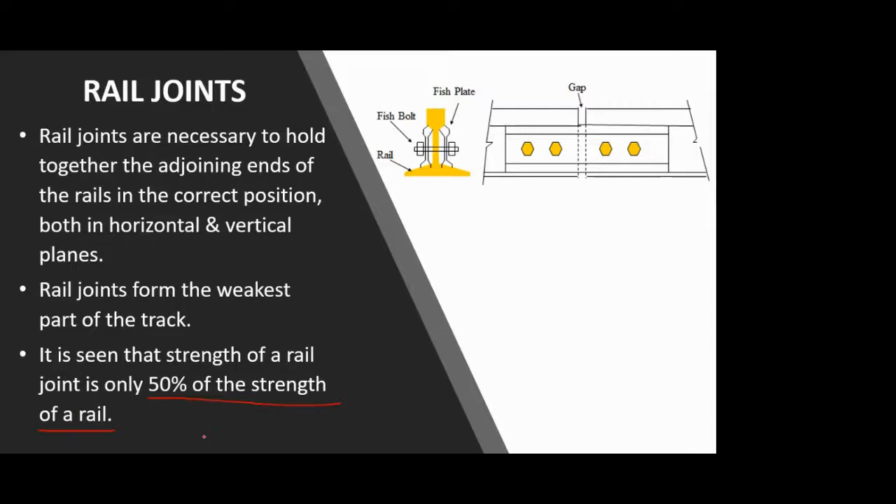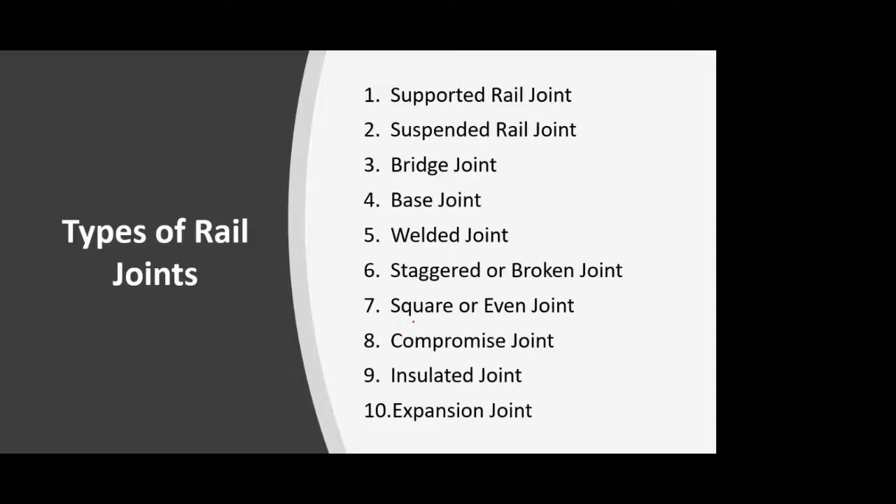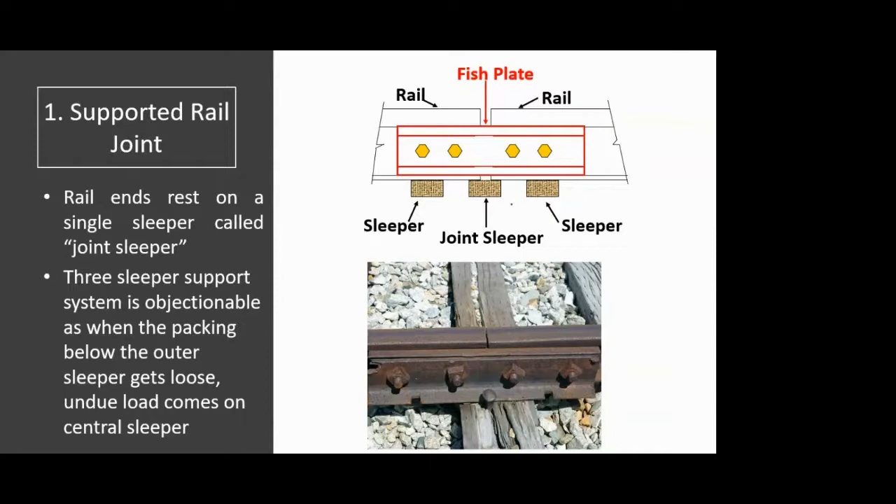Then we saw the ideal requirements of a joint, and looked into the details of each type of joint. First, the supported rail joint, in which a joint sleeper supports the gap between two rails. Then the suspended type, where the joint sleeper is absent and the gap is kept suspended between two shoulder sleepers.

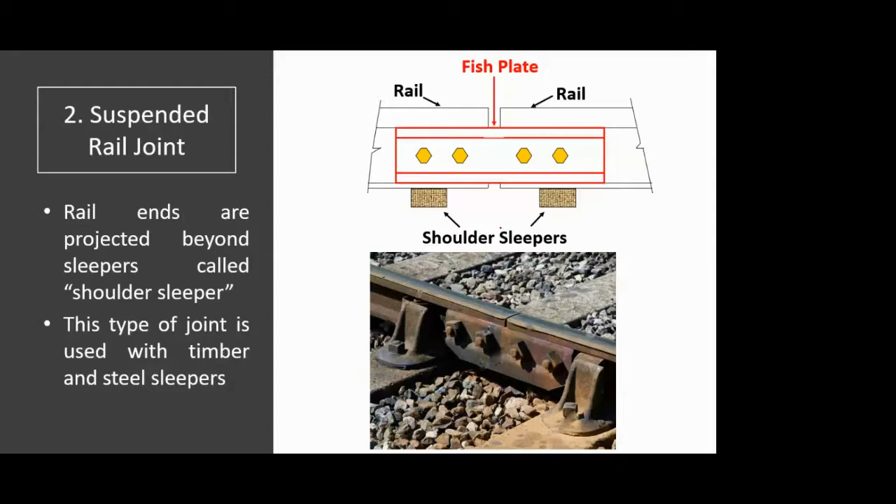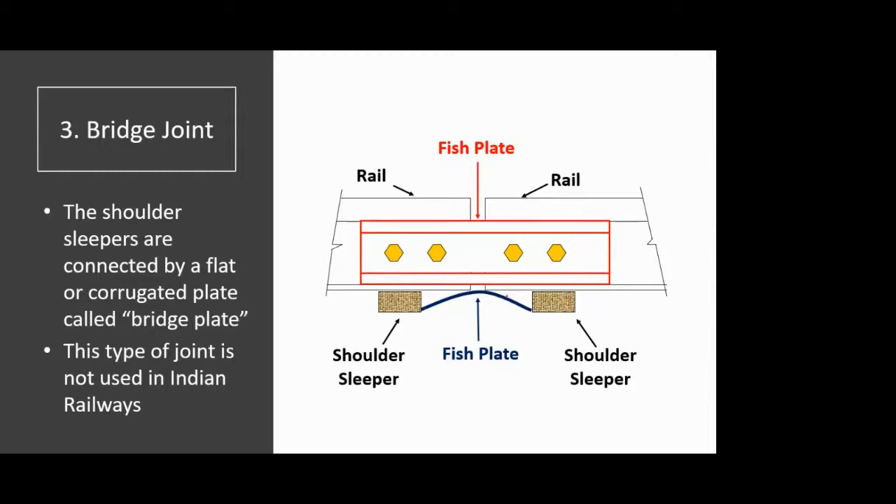In the bridge joint, the gap is supported by a fish plate, which is a metal plate in a curved shape. Generally, we don't use this type of joint in Indian Railways.

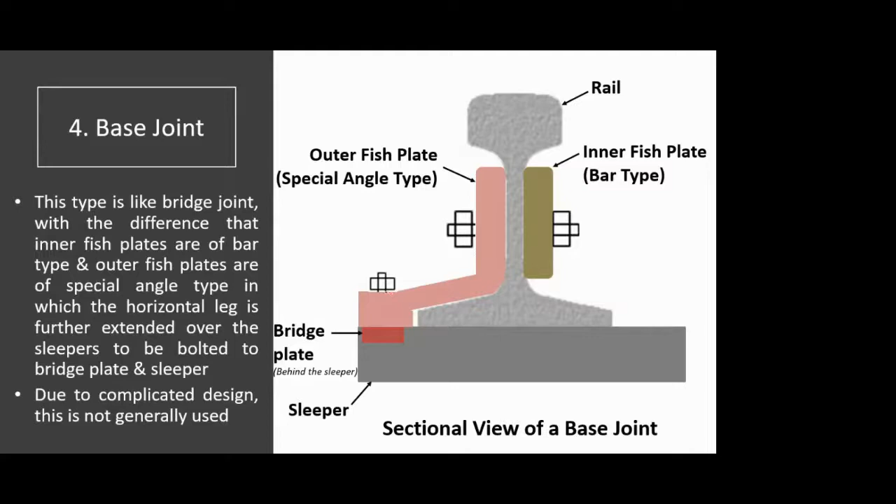Then you have a base joint, which is a bit complicated in design, as you have two different types of fish plates. The inner one is a simple bar type, but the outer one is a special angle type, so that its shape matches the foot of the flat-footed rail, as well as the bridge plate and the sleeper. Its leg is connected to the sleeper and the bridge plate at different locations.

Then we saw the welded joint, which is almost an ideal type of joint. In this, the gap between the two rails is simply filled by a weld material.

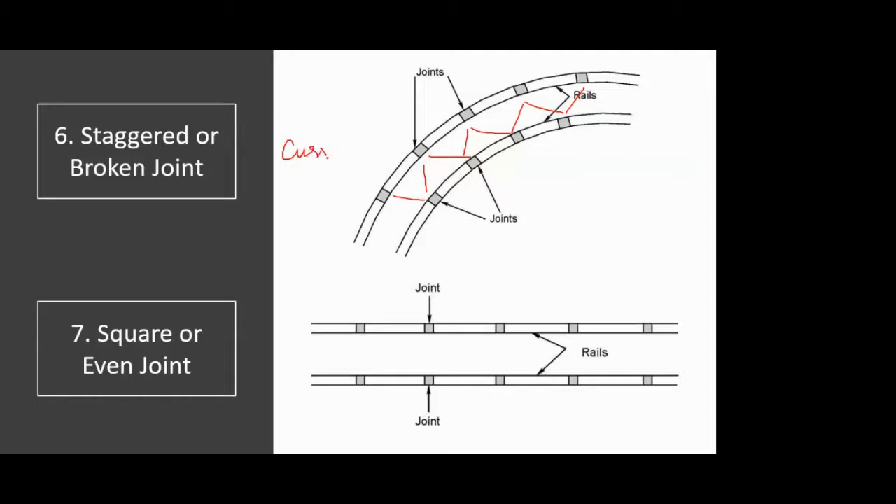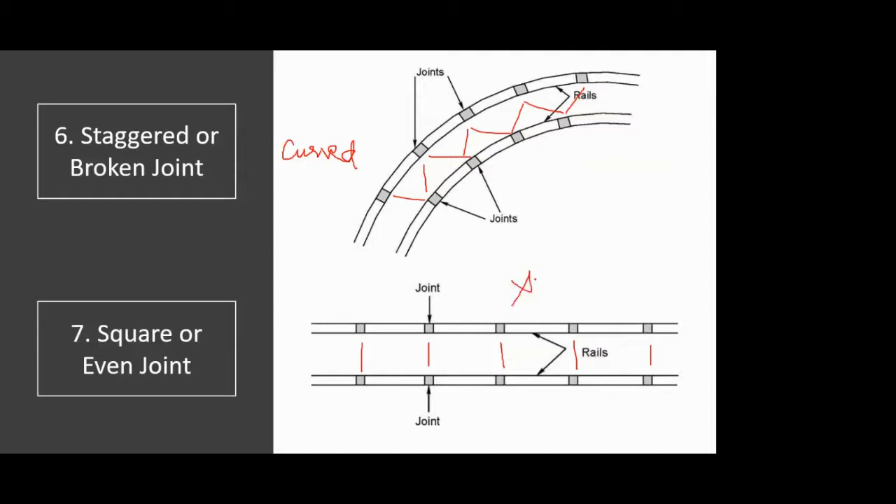Then we saw staggered and square types of joints. Staggered joints have the joints on opposite rails in a zigzag manner, found on curved sections. Square joints are parallel to each other and are found in straight sections.

Then you have a compromise joint, used when you have two different types of rails to join, where you only have a small indentation or change in shape of the connecting fish plate. The insulated joint is used to cut off the track circuiting.

If anyone is interested in track circuiting, you can search it on the web. The last one was the expansion joint, in which gaps are maintained at particular distances, allowing free expansion of the rails so that thermal stresses are not induced beyond a certain limit. So these are the types of joints.

Then we covered the evil effects of joints, and the remedies to overcome these effects, such as using shims or repressed fish plates, along with other remedies that are more a part of regular maintenance work that goes on in the railways.

So today we'll cover a short topic on welding of rails. We all know, or must have seen at some point, what welding is. Many of you might have also done hands-on welding during your first year workshop, where you were given basic knowledge of it.

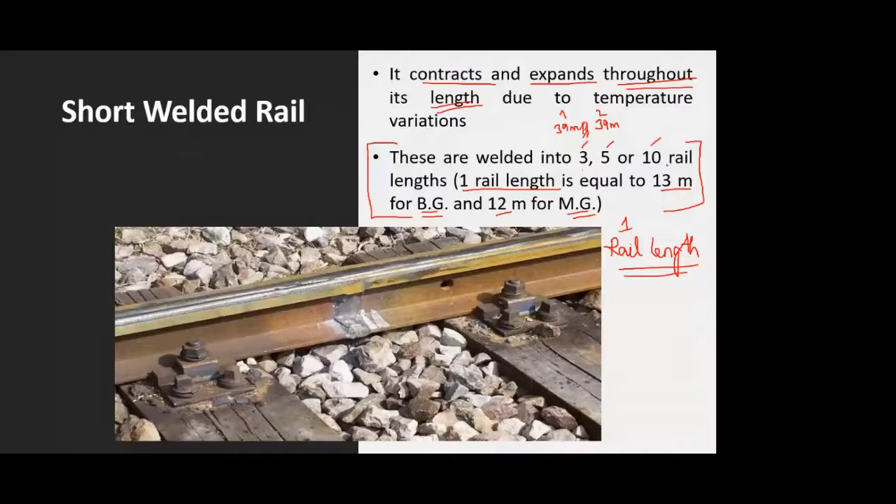Now coming to the long welded rail. So what it is, it's just a change in the length, that the minimum is 200 meters for broad gauge or 300 meters for meter gauge, and maximum length of this long welded rail goes up to 1 kilometer max.

So here we saw the length of your short welded rail was either 39 meters or 65 meters or 130 meters. 130 was the maximum length in the short welded rails, one rail being 130 meters on this side and 130 meters on this side. So when you weld them, it becomes a 260-meter length, something like that.

But in case of long welded, the minimum length itself is 200 meters. And the main difference between long welded and short welding is, if you see this figure at the bottom, this is my total long welded rail section. Suppose LWR is nothing but long welded rail.

So suppose, for understanding purpose, I take 100 meters, so if this total length of the long welded rail is 800 meters, the expansion and contraction which will happen in this long welded rail will not happen in the complete 800 meters. So here you can see you have two types: the breathing length and the non-breathing length.

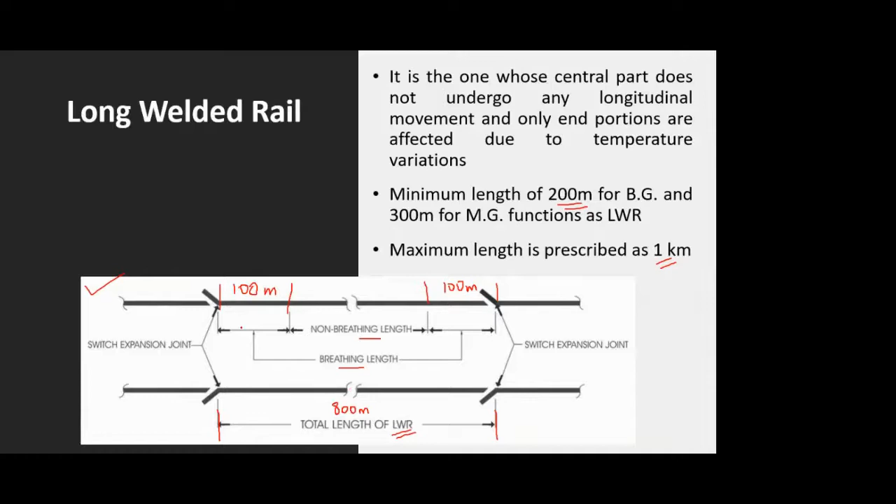So breathing length is nothing but at the ends of these rails. Out of this 800 meters, suppose the last 100 meters on both sides - this is just for understanding purpose, I am taking these values. So the ends of this 800 meters, that is 100 meters on the left side, 100 meters on the right side, only these lengths will undergo expansion and contraction.

So those are termed as the breathing length. And the central section, which comes out to be 600 meters in this example, will be a non-breathing length, as it will not undergo any expansion or contraction due to the temperature variation. So no expansion and no contraction in this non-breathing length, and only expansion and contraction will be in this breathing length, which is at the ends of the rails.

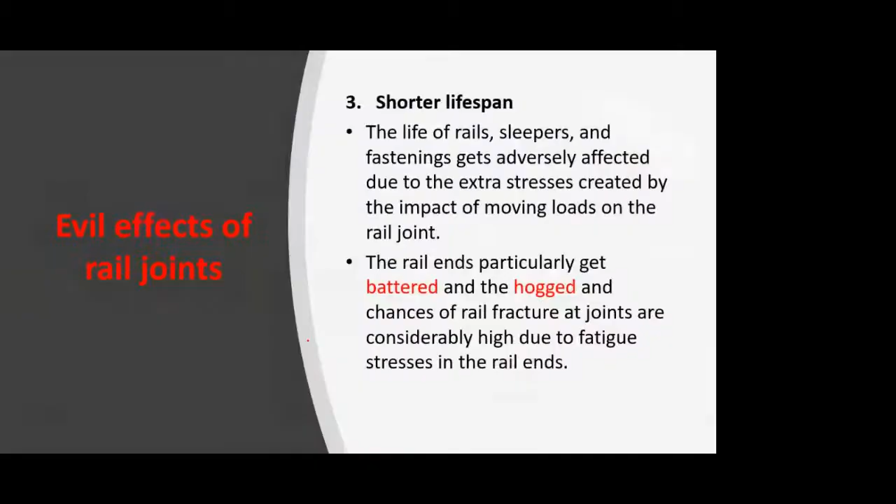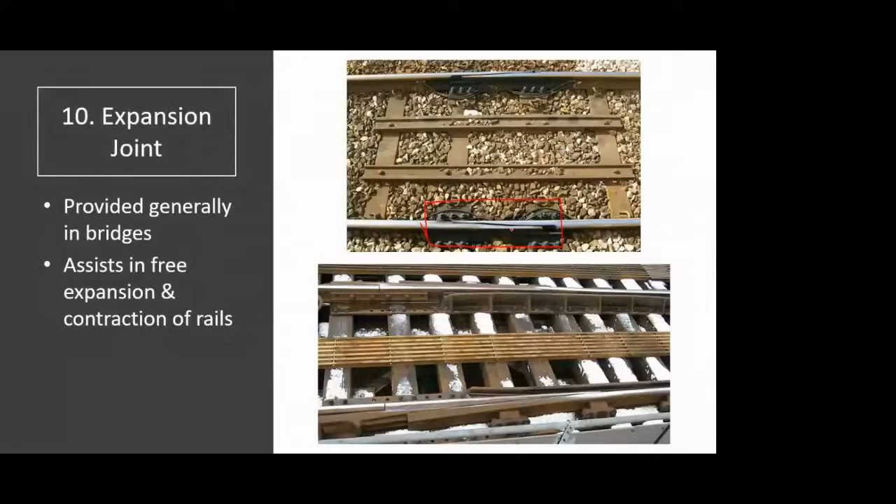So that's the main difference between the long welded and the short welded rail, other than the difference in length. And whatever expansion happens at the end, that expansion is allowed using this expansion joint that we had discussed yesterday. So whatever these kind of joints you see, expansion joints, they are mainly at the end of this long welded rail. These joints are nothing but the expansion joints that we saw in yesterday's lecture.

They are also now termed as a switch expansion joint. In Indian Railways, you can find the short form SEJ, which is nothing but switch expansion joint, found at the end of your LWR section. LWR is nothing but long welded rail.

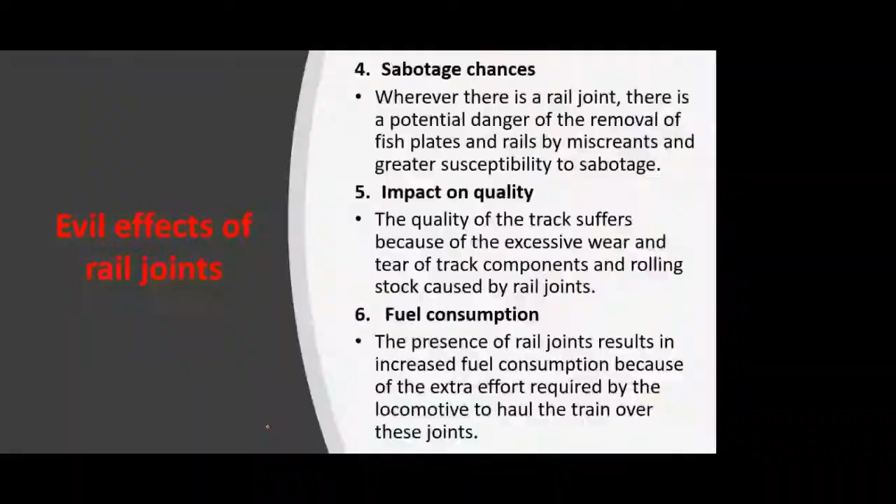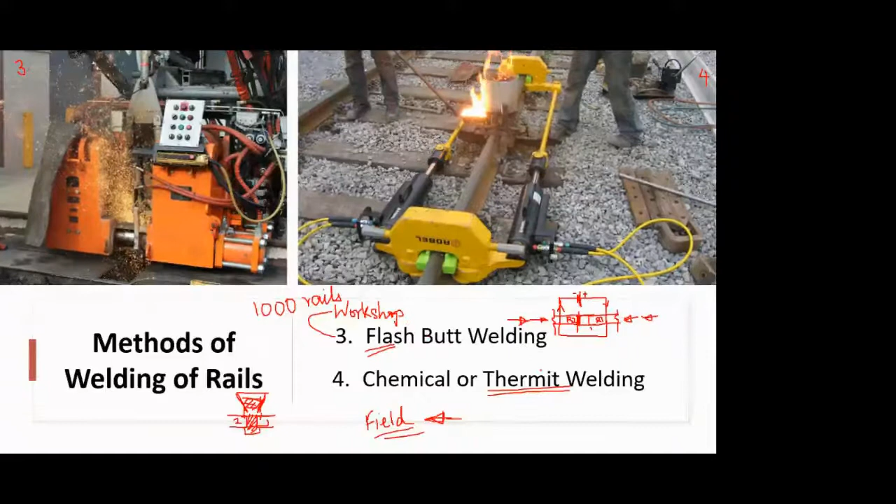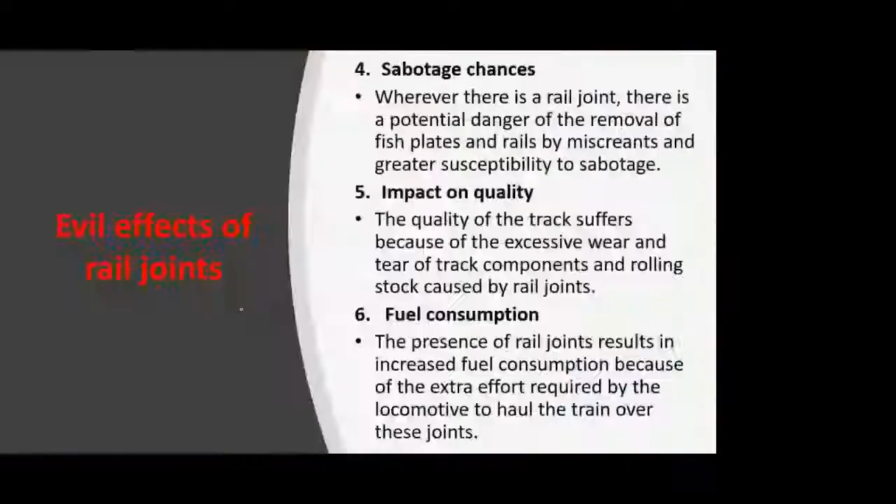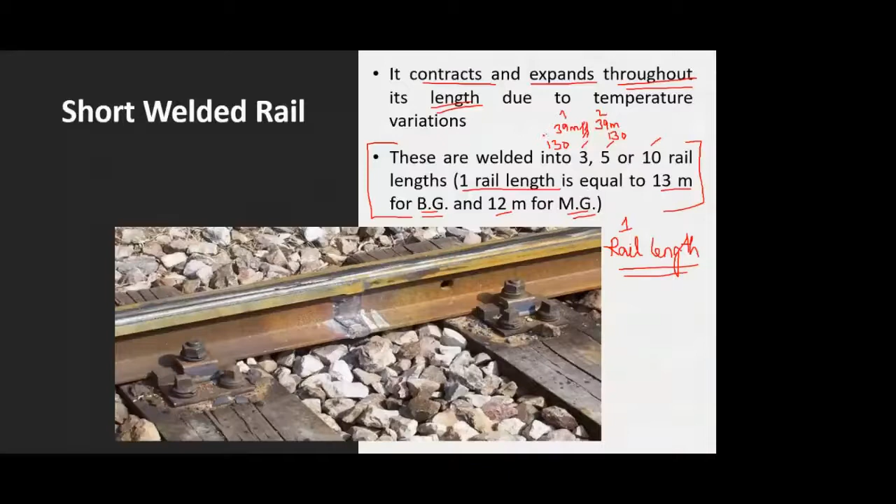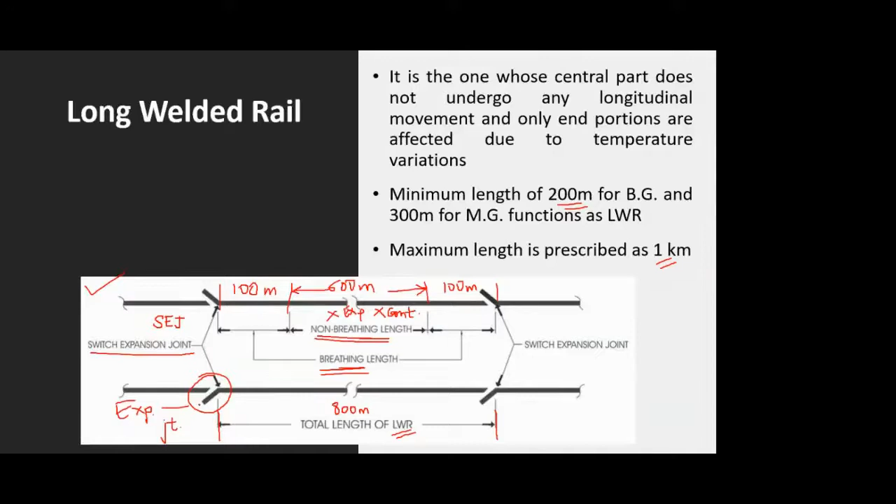But in case of long welded rail, the expansion and contraction only take place at the ends, and the central portion remains as it is. So it's a non-breathing length, the term used for the length that does not undergo expansion contraction, and the length that undergoes expansion contraction is the breathing length. The joint provided for this expansion contraction is the switch expansion joint, SEJ, or simply the expansion joint that we saw in the last lecture.

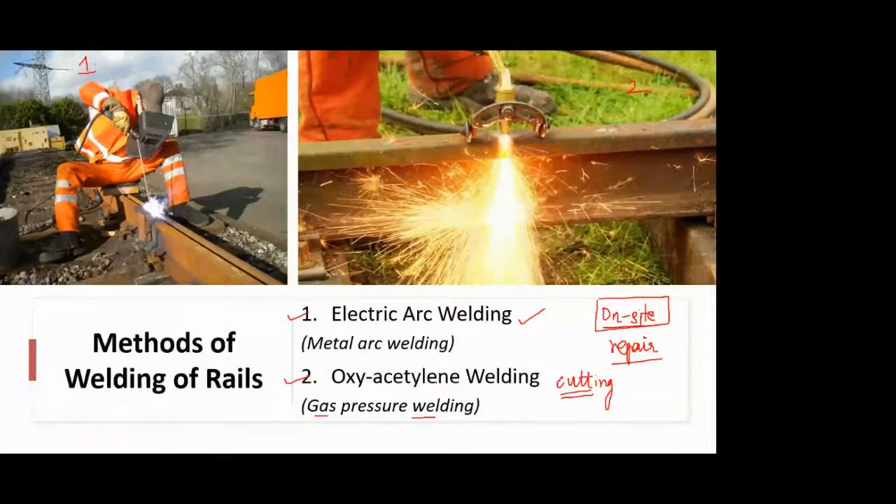Then we have four different methods: arc welding and gas welding, generally for on-site and small repair works. Gas welding, or oxyacetylene welding, is mainly for cutting purposes. The third type, flash butt welding, is mainly used for large quantities of welding work, mainly in a workshop in a closed environment. And the fourth one, thermit welding, is the widely used on-field applicable type of welding.